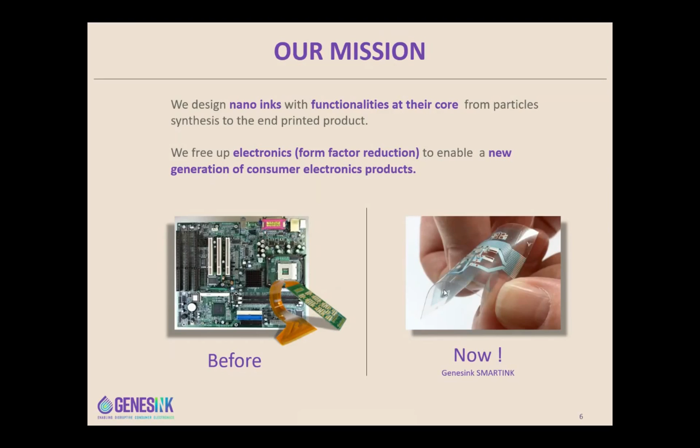In this slide, we'll see what problems we solve and how. As you all know, the next generation of electronic devices need to be smaller and more flexible. We do this by controlling the entire value chain: we manufacture the nanoparticles ourselves, then formulate them into inks, and our clients test the inks. Then we create prototypes, and we're able to fine-tune the inks even further when required, and finally support the client until the very end production step.

High power conductivity is critical in some applications, and existing technologies in the market don't reply to this need. Our nano inks are 5 times more conductive than the market leaders out there, solving various issues with regards to conductivity.

As you all know, existing traditional electronics create a lot of environmental issues as they're also operator unfriendly. We solve this because at GenesInk we care a lot about the environment and sustainability, and all our ink formulations are non-toxic and non-cancerogenic products. Most of our competitors are only at lab level. Even though we are a smaller company compared to our competitors, we are able to manufacture at ton scale with no issues with repeatability and quality.

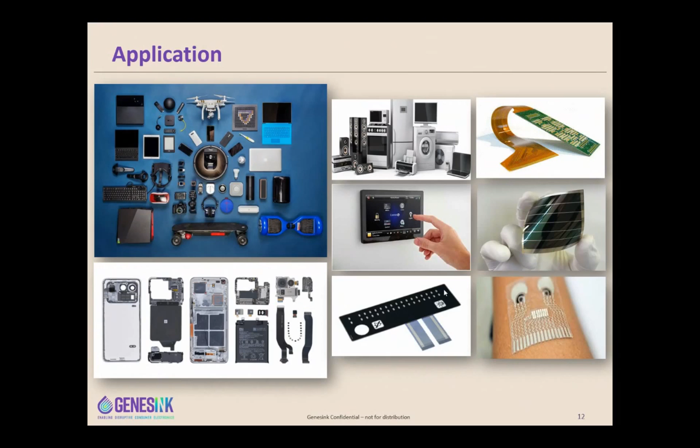Fine line printing can also be used as ITO replacement by printing ultra-fine silver grids, and nano inks are the key to the success here.

Let's have a look at the trends in the industry today, followed by the customer challenges. So to start off with the first trend, which is the COVID effect.

COVID has played a big role in redefining the trends. Face-to-face physical meetings are of the past, and we have more and more new forms of interaction with the world, with social distancing becoming the new norm. Also, with many spending more time at home, this has paved way for many companies to explore and exploit the huge sector of home gadgets and smart home technologies.

Digital health and safety concerns: the pandemic gave a radical boost to healthcare IoT technologies used mainly in the public health sector, but its influence on consumer gadgets is no less exemplary. Companies are moving to create more COVID infection detection kits and monitoring kits as demand for rapid lab-free COVID-19 testing has exponentially increased. Of course, the pandemic has also made a mask a new must-have accessory.

While designers are working on making it part of their fashion collections, IoT companies and developers are enhancing this vital part of the new normal with additional functions.

Before the global pandemic, the technology sector was developing at unprecedented speed. However, COVID massively accelerated the process like nothing else had before, and now we see there's an increasing adoption for 5G.

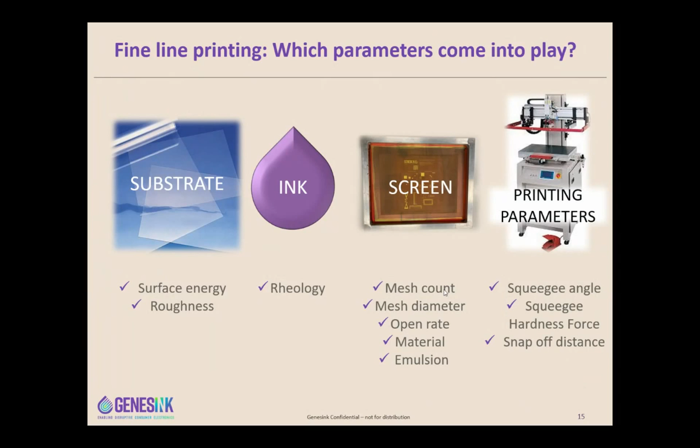So let's focus on the screen and the printing parameters. For the screen, a stainless steel mesh produces a more stable and accurate print because this material is harder than polyester. A high mesh count is required to obtain high resolution printing. The choice of mesh thickness, emulsion thickness, and open area should be done regarding the targeted printed thickness.

Also, a hard squeegee is required for fine line printing, and a high squeegee angle helps to transfer the right amount of ink. So work must be done to adjust the quantity of ink transferred, enough to ensure good conductivity, but not too much to avoid spreading of the ink.

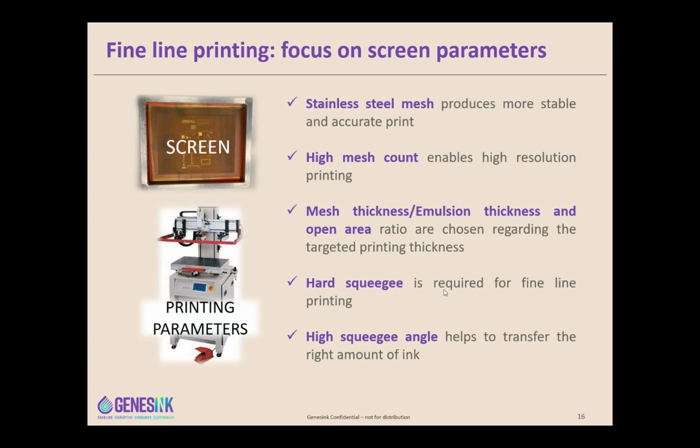Concerning the ink, GenesInk has designed a ready-to-use solution for fine line printing, the Smart Screen R. It is non-CMR, solvent-based, and contains no binder, which ensures high conductivity even at low temperature. It is easy to process and easy to clean.

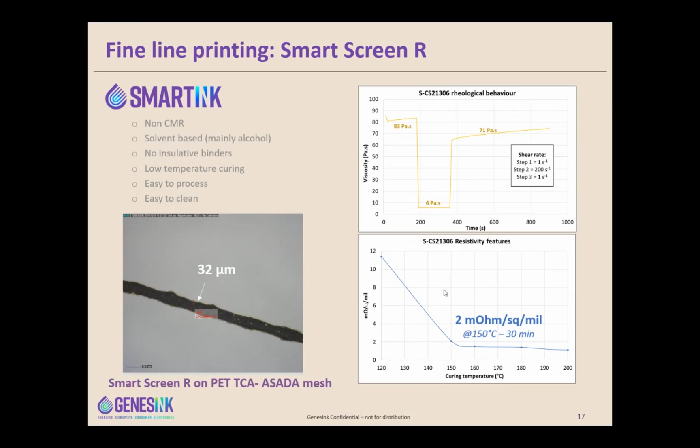So this ink covers a wide range of customer applications. But in some very specific cases, like when using a tricky substrate imposed by a certain application, this ink can require a formula customization to achieve lower resolution, as we will see in the next slide.

So let's move on to a customer case. We were contacted by a customer for a project for FPCB application. He had a target to print a 50 micron line resolution, but with a specific mask and also a specific substrate. With these constraints, GenesInk Smart Screen R performances were not sufficient.

So in that case, GenesInk's strategy is to work together with the customer through the customer pre-sale group team to find the best solution to this challenge.

GenesInk has created a team, customer pre-sale group, whose mission is to support customers through each step of its process, from proof of concept to production, passing by raw material validation, prototyping, and drop-in validation, by doing printing tests and formula customization. We stick as closely as possible to real application conditions in order to find the most suitable solution for the customer application.

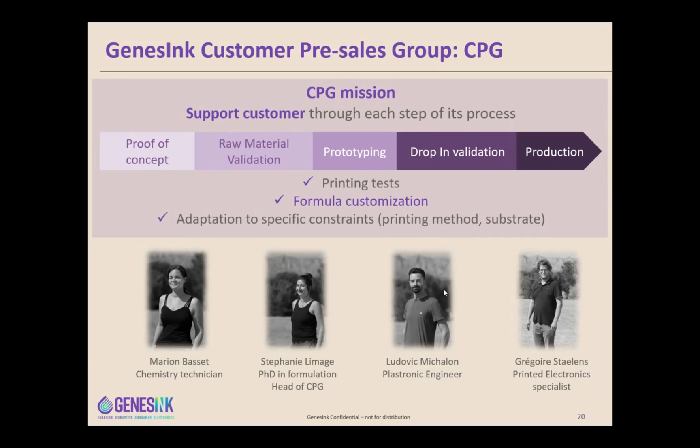So for our customer case, let's see how CPG works to adapt ink to the specific constraints of the customer. The work was focused on modifying ink rheology and simulating the screen printing process to improve resolution.

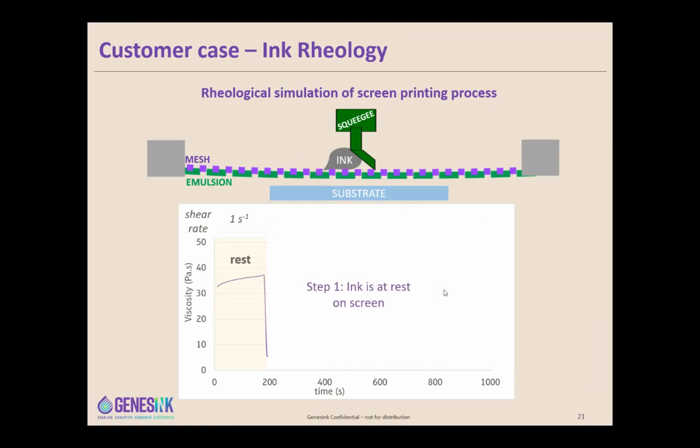What you can see here is a graph of viscosity over time when applying various shear rates to simulate screen printing. At first, ink is at rest on screen, simulated by a low shear, and viscosity is high. Then the ink is sheared when pushed through the screen meshes, simulated by a high shear. Here a low viscosity is required to ensure proper transit through the meshes.

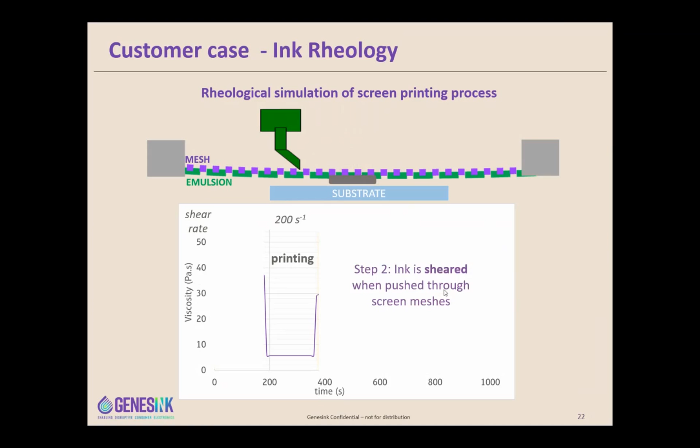Finally, ink is at rest on substrate, simulated by a release of shear. This is a key part, because viscosity should recover the highest value possible in order to avoid spreading on substrates and ensure good resolution. So the aim here is to increase this viscosity value immediately after shear.

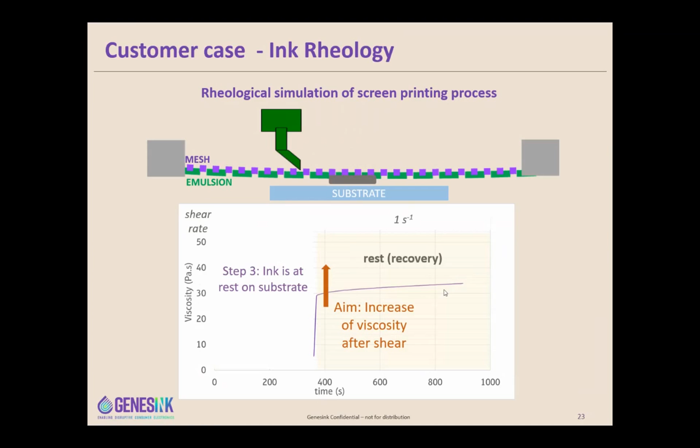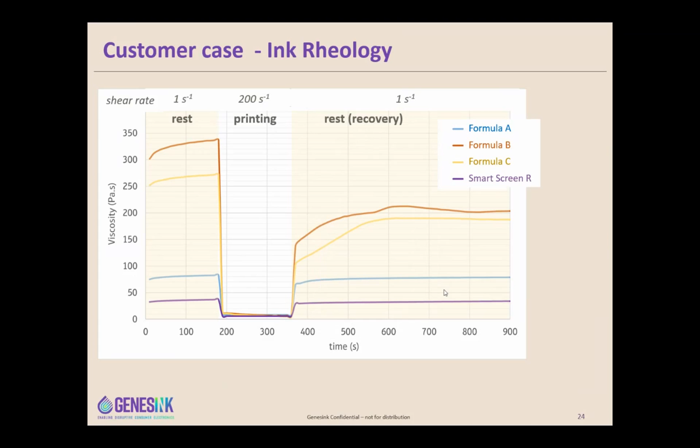Here you can see the several ink formulas that we tested to increase the viscosity value after shear. We performed several iterations and finally ended with Formula B, which has the highest viscosity after shear. So now let's see if this improvement of viscosity has led to an improvement of resolution.

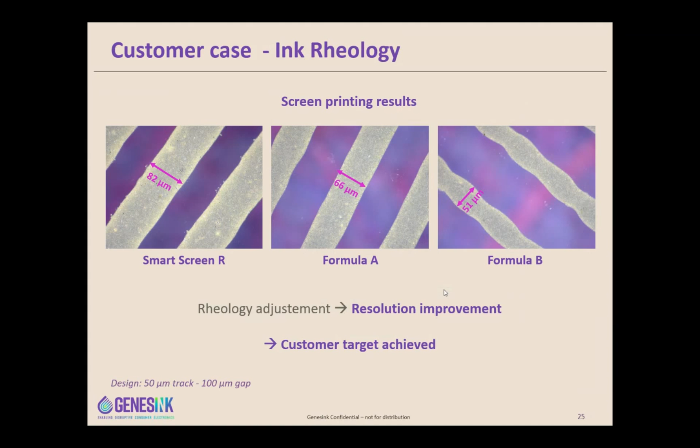Here you can see microscopic pictures of the printed lines obtained with the customer mask and substrate. We can see that for Smart Screen R, resolution was insufficient. With Formula A, the resolution was improved from 82 microns to 66 microns. Finally, with Formula B, we reached 51 microns, which was the target of the customer. So this shows how rheological modification can improve resolution.

Thank you, Stephanie. Now, before we end this webinar, let's move on to the conclusion. The first and foremost important point is that fine line printing is the key to form factor reduction and to all the problems that designers face or struggle with regards to finding space in the electronics. And what we also see is that fine line printing opportunities are large for various electronic applications.

With progressions made in printed electronics, we know the applications are vast, and we don't know all the applications as of today. Even though 85% of clients use screen printing technology as the most widely used, we could confidently say that fine line printing is not limited to just screen printing. You could also achieve fine line printing using inkjet or flexo.

Nano inks are key for fine line printing, and they also address various issues faced in the electronic industry today. GenesInk offers a wide range of solutions. It could be off the shelf or customized to meet the client's needs and requirements.

Stephanie gave a good example of a business case where the client was in big trouble and they approached us, and within a span of a few months, we were able to fine-tune the ink to meet their needs and requirements. It's thanks to proactive teams such as the CPG team that we have here at GenesInk that we are able to reply to all the needs of our customers with regards to fine line printing.